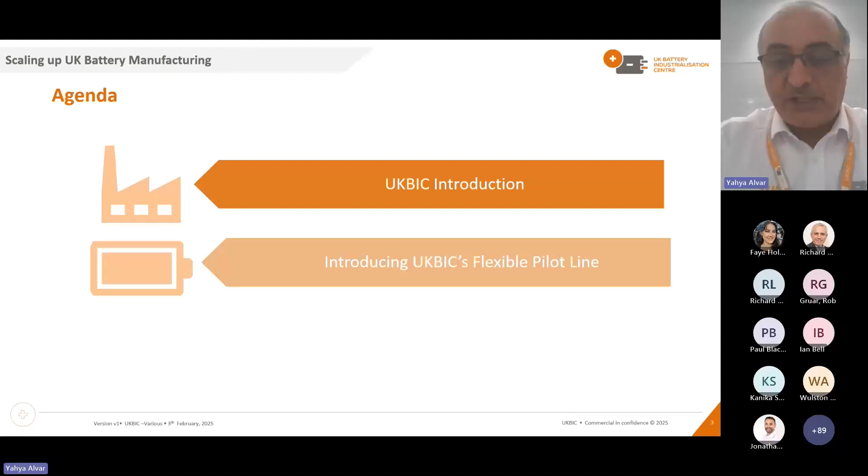The agenda for today, as I explained very briefly, is a very quick introduction about UKBIC capabilities in general, and then a bit more in depth, introducing UKBIC's flexible pilot line capability, which will be up and running around Q3 this year.

So UKBIC, as many of you already know, is part of the Faraday Battery Challenge, which was a £610 million challenge over the last 8 years, focused on research, development, scale up, and industrializing anything about batteries, and developing the battery ecosystem in the UK.

Initially, £130 million was invested in the facility to build a scale-up facility to support product development and process optimization for different customers. More recently, we had a bit more investment in the facility, installed different capabilities, and improved our capabilities to offer more support for a different range of customers with different requirements.

We are based in Coventry, next to Coventry Airport.

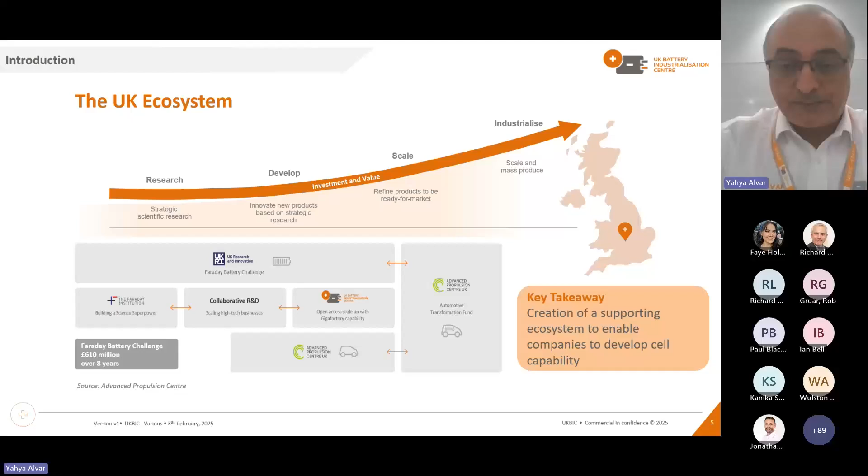So the initial idea was that UKBIC should be supporting customers who have got their developed product ready, around TRL 6, TRL 7. The idea was that we had to support customers to scale up their products, to optimize battery manufacturing processes, and help them to be ready for giga-scale manufacturing. So the whole idea at the beginning was that UKBIC should bridge the gap between university scale, gram level scale product development, and giga-scale volume manufacturing.

But in the last 4 years, we have realized that many of our customers are sitting at a bit lower TRL and lower MRL. For that reason, further investment was required to bridge the gap between lower TRL, lower MRL, and where our current capability is. For that reason, the flexible pilot line came to play, which will cover TRL 4, TRL 5, TRL 6 stage, and I'm sure Richard will cover that.

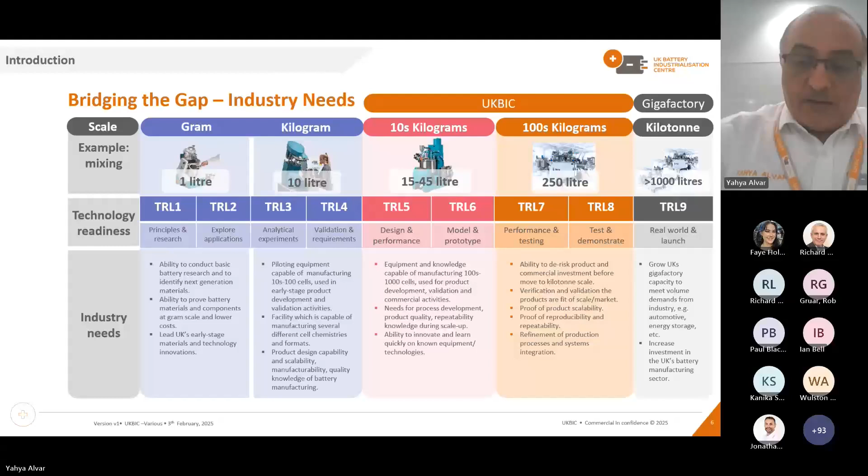UKBIC currently has anode manufacturing, cathode manufacturing at giga scale. We also offer cell assembly for two different types of cells: pouch cells and cylindrical cells, 21700 cylindrical cells, and 300 by 100 pouch cells.

We also offer formation, aging, and testing for both cylindrical and pouch cells, as well as agile module and pack build facilities, including end-of-line testing. The whole idea about module and pack is that we deliver and develop DFA, DFM, and help customers understand how they can automate their manufacturing processes to achieve higher throughputs and lower the risk.

We are an open access facility to anyone who would like to develop anything around battery technologies. We do different trials, we do different product development runs, and most importantly, we don't want to maintain or retain any IP from any customers.

Any background IP that a customer has is customer IP, and any foreground IP we create throughout manufacturing processes at our facility also belongs to the customer. And that on its own is a very unique business model globally.

We also support customers to train and upskill their engineers, their operations people, and help transfer their skill set into the battery manufacturing area.

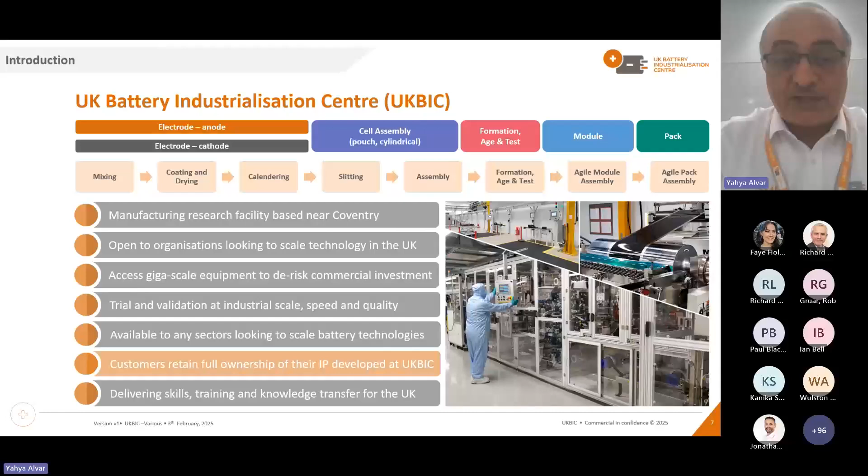About the industrial scale-up line, the line that we currently have is volume-scale battery manufacturing equipment that you can find in any giga facility around the world. This facility is a development facility we designed to be very modular. Different customers can start from different parts of the line. For example, if you want to start from coating and don't want to share your mixing IP, you can give us ready mix slurry. As long as it's compatible with our line's capability and limitations, we're happy to take that slurry and push it into the coating line, drying line, and make coated material. Or if you give us coated electrode, we can push it into our calendering line and start calendering the material. For that reason, our facility is very flexible and very modular.

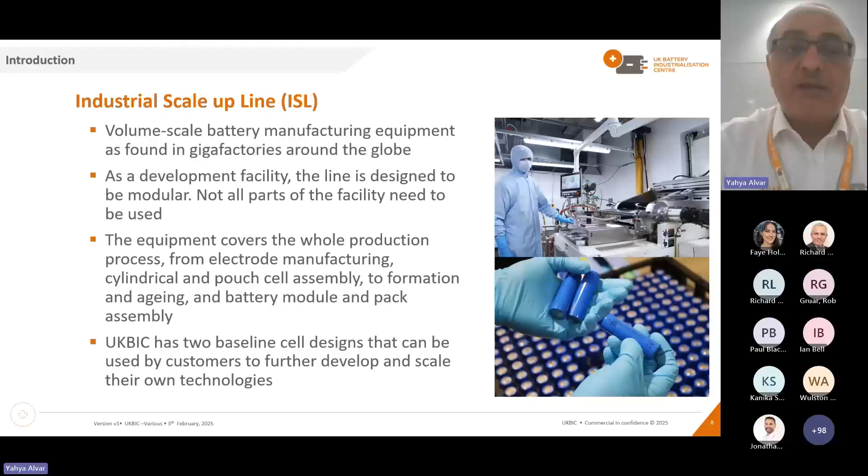Our processes currently cover equipment and processes end-to-end, from electrode manufacturing into cell assembly, formation, aging, testing, and then we can move those cells into module and pack build facility. To that extent, it is a one-stop shop. And we have got the baseline cell design for both cylindrical cells and pouch cells. We can work with different customers to use the same platform as a baseline to benchmark their own technology, and then they can see the journey of how they can improve their cell performance against the baseline cell.

As I mentioned, we realized we need a bit more equipment and investment to bridge the gap between where we are and where most of the customers are sitting right now. For that reason, £74 million was invested via Innovate UK and the Faraday Battery Challenge in our facility. We installed a flexible pilot line, which Richard will explain in more detail. We installed a new battery lab, which is operational right now and has got 5 different sections. We presented the new battery development lab in another webinar. Again, the slides and recording are available via the UKBIC website. If you have further questions, please get in touch.

We are also installing new clean and dry rooms, which will be available very soon. The idea is that we share those clean and dry rooms with different customers and do co-development with them to help them go to market much sooner and much faster. This is just a very brief explanation of what UKBIC already has and what we currently offer.

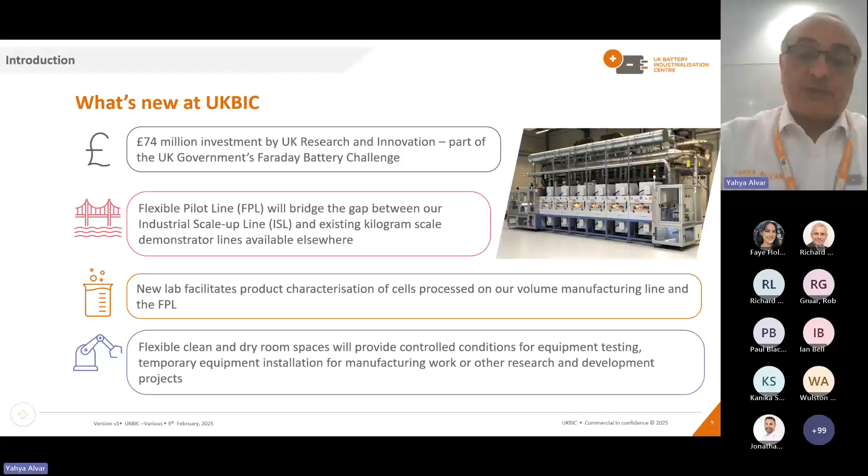I'm going to pass it over to my colleague, our CTO, Richard LeCain, who will explain about the flexible pilot line. Great, thank you Yahya, thank you for that introduction, and thank you to everyone who's joined the call today. I know your time is at a premium, so we appreciate you joining the webinar today. I'm Richard LeCain, the Chief Technology Officer at UKBIC, and I'm going to introduce UKBIC's new flexible pilot line today.

So what is the flexible pilot line, FPL? As Yahya has been talking about, there's a need to bridge the gap between smaller scale chemistry and cell development and industrialization. The gap today is for early production quantities between the hundreds and thousands. We have facilities in the UK like WMG, and we're pleased to have the chief engineer from WMG on the line with us for the Q&A today, Rob Gruar. I'll be speaking to him later. The WMG facility is geared towards chemistry and low quantities of cells, early stage development and prototyping.

The industrial scale-up line that we have at UKBIC is more geared towards hundreds of liters of material and thousands of cells. So to bridge that gap, the FPL is being installed at UKBIC to streamline that journey from early stage prototype to industrialization. Today we're going to be talking about the electrode side of that. That's the first part being installed now. Currently equipment is coming in and will be commissioned this year. The cell assembly part of the flexible pilot line will come on after. So today we'll be talking about the electrode development side of the flexible pilot line.

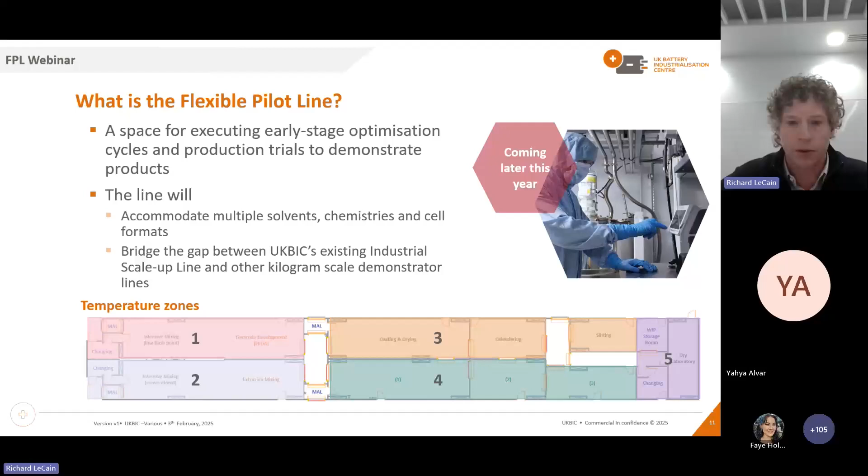So what does the flexible pilot line provide? There are 5 zones, each capable of minus 40 degrees Celsius dew point, allowing a controlled environment in each area. There are secure material airlock access points which protect customers' intellectual property at each point.

So there are multiple entries into the areas. Traditionally you may gown up in the mixing area and have to go through the whole thing. But if you're a customer here working in a specific area, we can segregate that and wall off access to certain areas so that your intellectual property remains secure. So it offers developers early access to industrialization and a flexible approach for developing electrodes.

I think one of the biggest points of this is the low cost, efficient, quick turnaround, and low quantity of material needed to use these lines. Like we've been talking about, the step from a smaller, earlier prototype line to the industrial scale-up line is very large. And to run a campaign on the industrial scale-up line, you're talking hundreds of liters of materials. That's a lot of cost of materials when you're talking about NMC, binder, and conductive additives.

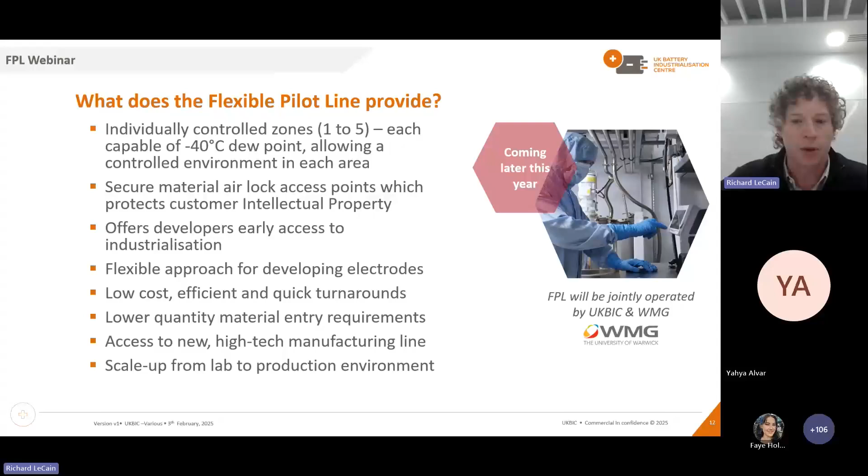All right, and with that, I'm going to show you an animation about the line, and we'll explain a little bit more of the details of that line, and we'll talk a little bit more in depth about what's in those rooms and what that equipment is capable of on the other side.

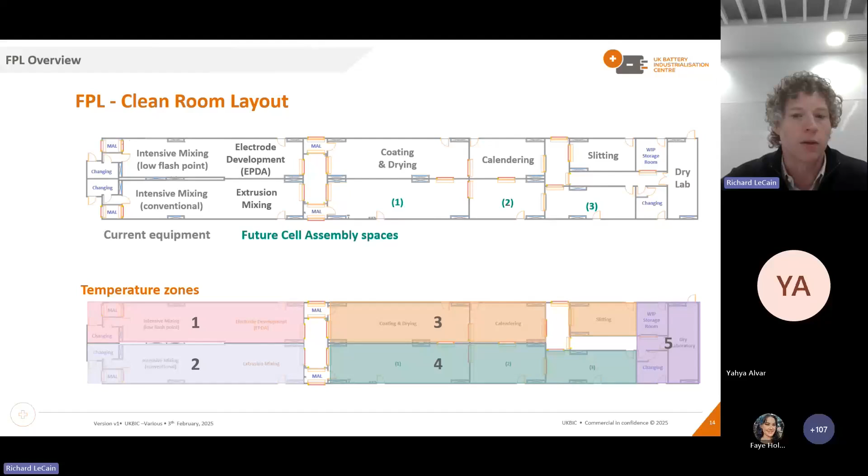So let's dig into the different areas and what they're capable of. In the mixing area, 2 mixing lines in a clean, dry environment. So the intensive conventional solvent mixing area, 15 liters up to 45 liters, and the low flash point solvent mixing line, 15 liters up to 45 liters.

There will also be an extrusion mixer there, so a continuous throughput mixer. I think a lot of facilities are looking at bringing on this capability, and this would be a place where you'd be able to come and trial that type of mixing if that's what you're looking to develop. So a 20 liter per hour continuous mixing process will be installed as well.

There's an electrode process development area. This is a much smaller coating line to look at electrodes. So a couple of small mixers, a roll-to-roll coater with a slot die in it with a 1 meter dryer. This is to help develop coating processes as you go forward. Separate anode and cathode processing areas allow for safe use of powders and handling of emissions.

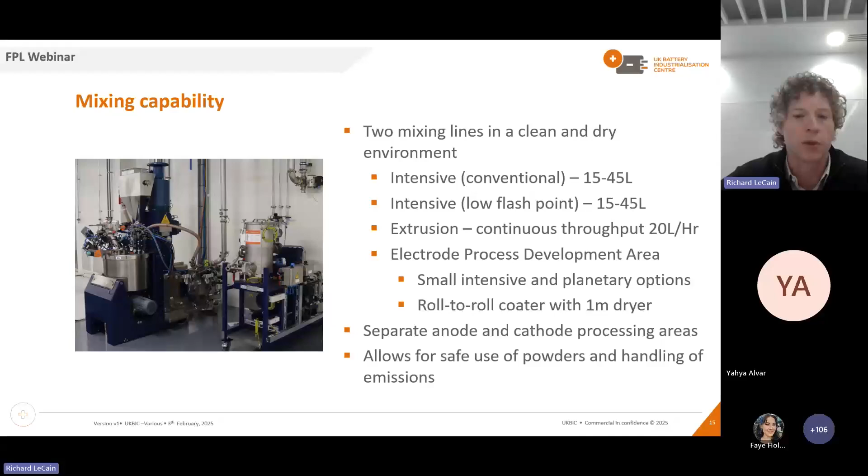Looking at the coater, it's a very good, capable Mathis coater. It's a single-sided coater, 6 meters of drying, with a slot die.

Since we are mixing multiple solvents, this can handle multiple solvents in the slurry. It's capable of 320 millimeter width. You could do intermittent stripe coating, continuous coat patterns. You could gear this down to about 0.5 meter a minute line speed, and it's capable of much, much higher than that.

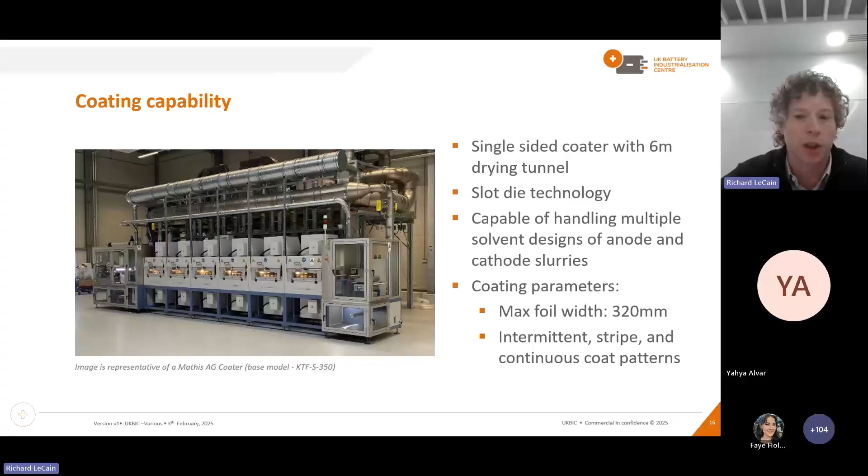The calendar is an InjaCal calendar, so lots of capability on this as well. There's an S-Wrap web path for roll heating, so the web can be heated before it enters the calendaring rolls. Calendaring rolls can reach 150-degree Celsius temperature. It includes web cleaning and edge trim functionality, and there's also a cooling roller at rewind to take heat out of the web as it's rewound.

Inline thickness measurement and surface inspection are included. It's a 2200 kilonewton calendar that can support a 430 maximum web width, and of course we can calendar intermittent stripe, continuous, or asymmetric coating patterns.

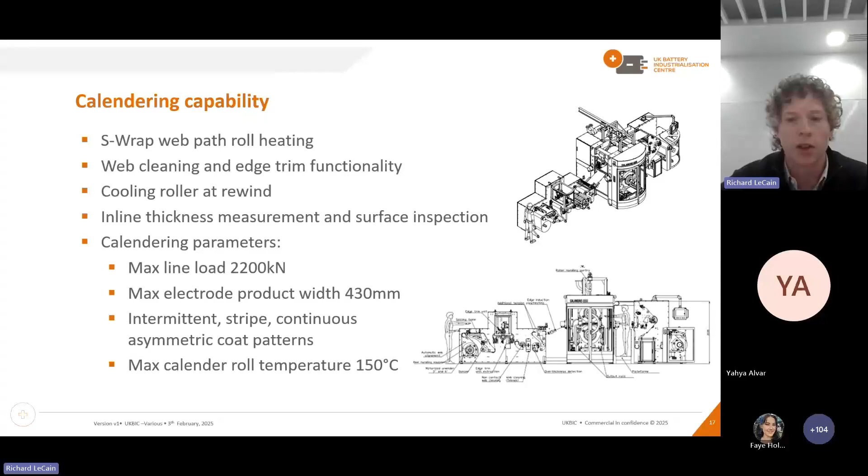On the slitting side, this is capable of 500 millimeter wide webs. It can run at 80 meters a minute, but can be geared down considerably below that if you're dealing with smaller amounts of material that need to be slit, and it includes dust extraction as part of the line.

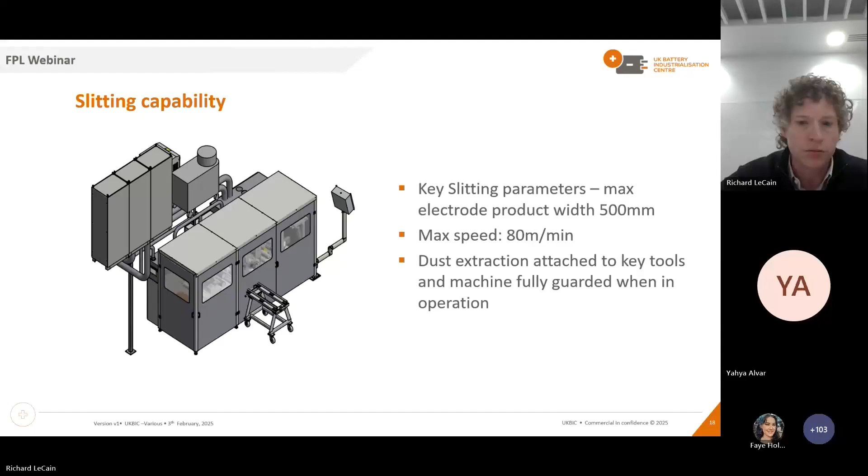The last room we'll touch on today is the dry lab. This is complementary to UKBIC's new battery development laboratory, which we had a webinar on last month. It's a very capable lab, designed to support customers on site who are going through the industrialization journey.

As you do that, there are things you need to find out about electrodes being processed. So we have SEM, FTIR, ICP available, along with lots of other pieces of equipment in there. I won't go through them all, but you can look on our website - there's a link to the webinar we did on that last month. This area is designed to support small-scale mixing and coating with companies using the FPL or the industrial scale-up line.

So it can assemble small coin cells, small pouch cells. There's a small mixing capability and drawdown table, and the ability to make small cells so you can look at materials more closely as you're working on equipment at the FPL or the ISL.

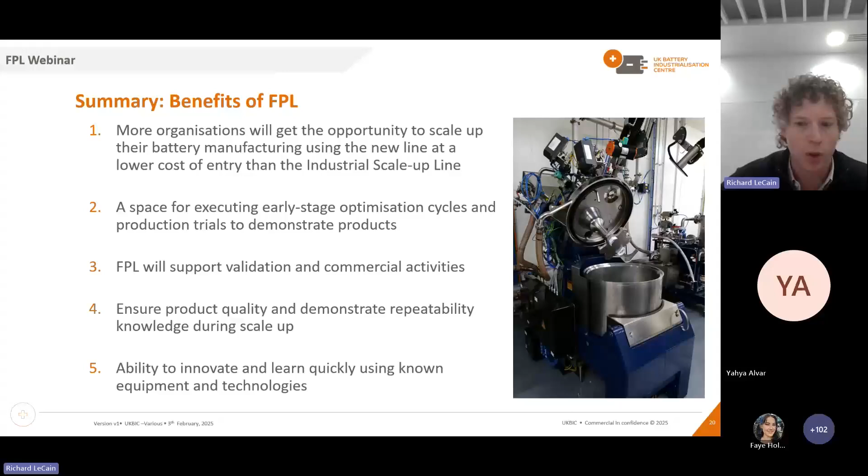And so with that, I'm going to thank you for listening to what the flexible pilot line is. Thank you everyone for taking time out of your day to join this call and understand the new capability that we're going to have online. We're bringing mixers in right now, doing factory acceptance tests, and building up this capability now. So I'm going to let Yahya take it over again and talk about what's coming up next.